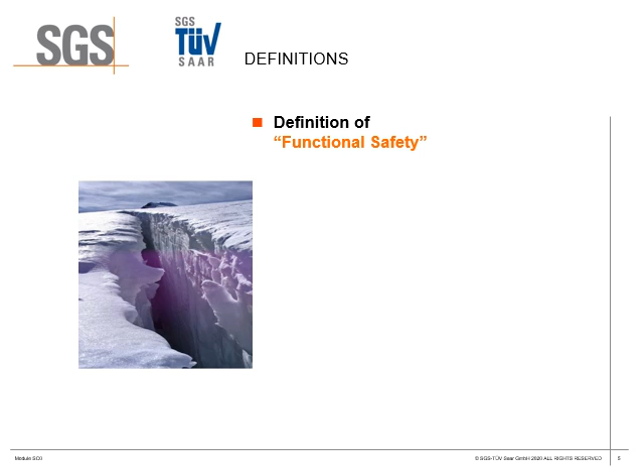But first of all, we have to do some definitions to understand functional safety. The definition of functional safety according to ISO 26262 is given as follows: absence of unreasonable risk due to hazards caused by malfunctioning behavior of EE systems. This is a complex sentence with some new expressions which I have to first explain.

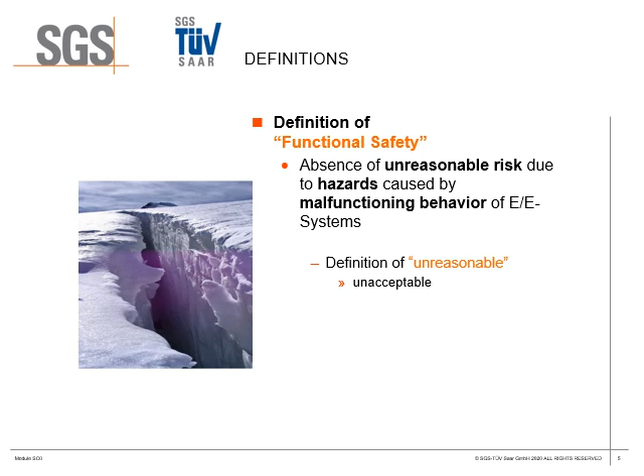What is the definition of unreasonable? What is the meaning of unreasonable? We can say unreasonable means unacceptable - unacceptable for most of us, that means unacceptable for society.

What is the definition of risk? This is very important to know, because risk is a combination of two things: the probability and the extent of damage. That means both probability and extent must be small or low to have a small risk. We can get a high risk even if only one of these components is high - if the probability is high that the damage will happen, then the risk is maybe high, or if the extent is high.

At the end of the day, we'll see that probability is the most important point for us, because if we can reduce the probability to a very low level, we can make the risk acceptable, or what is then defined by the standard as reasonable.

And finally, the definition of hazard. What is hazard? I define it in my own words as a state which may be dangerous for health and life. This is also important to understand - if we talk about functional safety, we talk about health and life, so nobody shall be injured or even dead.

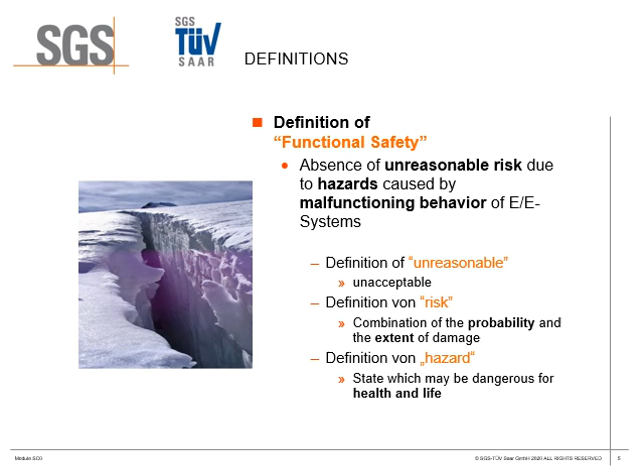This means, according to our definition, the malfunctioning behavior of the electronics may lead to a state which may be dangerous for health and life. Whenever we can reduce the risk to a reasonable level - that means absence of unreasonable risk due to these hazards caused by malfunctioning behavior - we achieve functional safety. In other words, we have to reduce the risk to the reasonable or accepted level coming from our electronics. Then we achieve an accepted level of functional safety.

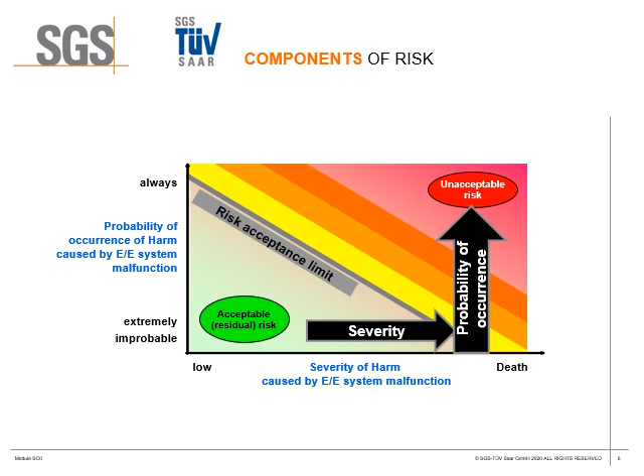This is the reason why standards, especially ISO 26262 for the automotive industry, introduce a level of risk called ASIL, the Automotive Safety Integrity Level. I think most of you have heard about it. It's not called a risk level, and we'll see why. First of all, to understand what it is, it's a 5-step scale: the lowest level is QM, then ASIL A, B, C, and D.

QM means that standard quality assurance is already sufficient to reduce the risk to the accepted level. In other words, the risk which we bring with electronics in the vehicle is acceptable by using standard quality measures. But this is very important: quality measures according to standards like IATF or ISO 9001 have to be established.

If we find out that we have an ASIL X, meaning ASIL A, B, C, or D, this means additional risk reduction measures are required. Additional means additional to the QM measures. The quality measures are already maybe a high level to reduce the risk, but additionally to this we have to add measures. The ASIL then describes the required integrity which has to be achieved by the determined safety goals.

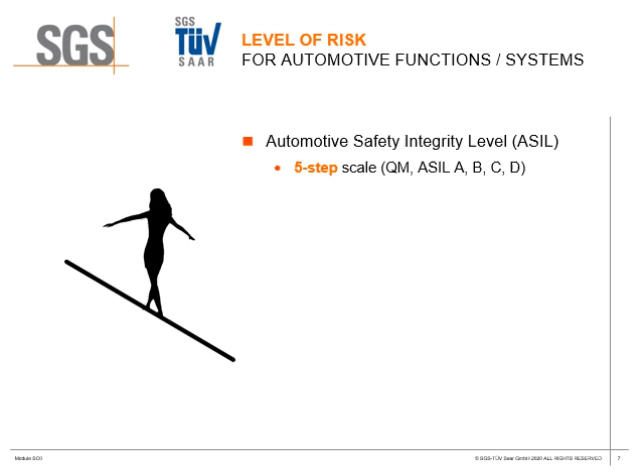Coming from the risk which we have to identify in the vehicle, we have to define so-called safety goals, and these safety goals then will get the ASIL. So first of all it is a risk level, but then it is a requirement to achieve a safety goal with a defined integrity. This is the spirit of functional safety: to define safety goals for the vehicle and to achieve these safety goals with a defined integrity, and the required integrity depends on the risk.

If we have an ASIL D, for example, as the highest level, we have to achieve our defined safety goals with the highest integrity due to the fact that we have a high risk behind it. So let's make an example. If we look at a functionality called driver airbag, the driver airbag shall deploy in case of an accident, to help the driver maybe to survive, to reduce the risk of injuries.

This driver airbag, which is driven by electronics, has the potential to deploy unintendedly, that means during normal driving, or it may have the problem that it will not deploy in case of an accident. Let's look at this unintended deployment. Unintended deployment during normal driving may lead to loss of control over the vehicle, and this may be dangerous, of course. So the result may be an accident.

So this is typically defined with ASIL D. It's a high level of risk that an accident will occur if we have an unintended deployment of an airbag. The safety goal which is then derived means an unintended deployment shall be avoided. And this safety goal must then be achieved with an integrity of ASIL D. That means QM is not sufficient; we have to do a lot of things additionally to reduce the risk to the accepted level.

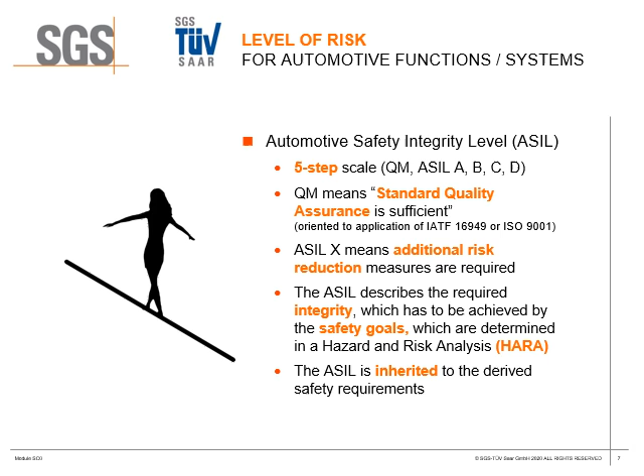Many people think it's a product property. No, it depends on the defined safety goals, and it depends on the risk behind it. And the ASIL never stands alone; the ASIL is always combined with the requirement. This should be clear in any case, otherwise you will never understand how ISO 26262 is working.

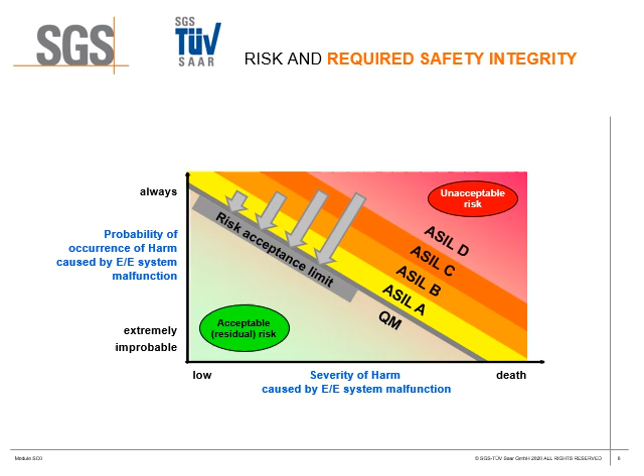So now, how shall we achieve functional safety in automotive functions and systems? The first point is to analyze the potential hazards and assess the risk. That means first of all we think about our potential malfunctions due to a malfunction of the electronics, like an unwanted or unintended deployment of the airbag.

So this is the hazard. And then we are assessing the risk. What is the risk behind? What is the probability of the accident at the end, and what is the extent of the damage to people? This is also called HARA, Hazard Analysis and Risk Assessment. This is always the activity we have to do when we bring new functionalities in vehicles driven by electronics or electrics.

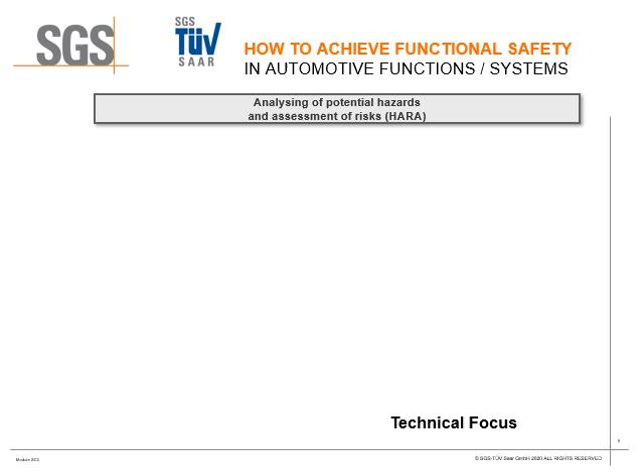So then the question is, if the ASIL is equal or higher than A, meaning ASIL A, B, C, or D, then we have to do additional measures to reduce the risk to the accepted level. If the result is QM, then standard quality management is sufficient, as already shown before. This does not mean that this malfunction will never lead to an injury to people. This only means that the risk can already be accepted by using quality management.

So let's go on. We say ASIL A, B, C, or D, additional measures to reduce the risk to the accepted level. What do we have to do now to achieve it? The first is the avoidance of systematic faults in general. Of course we have to know what systematic faults are.

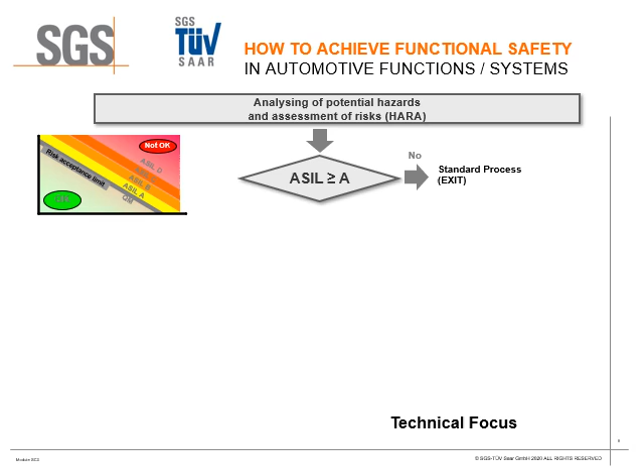Systematic faults, in general, are the faults which we bring into the product by our own doing - by a bad or wrong specification, by missing something in the processes, by missing something during the testing, and all these things. This means systematic faults, if we have a fault in the product, then all products have the problem that they have the same fault. And of course the highest target is to avoid these systematic faults.

How can we do it? We have to implement safety management, so-called development processes and supporting processes described in ISO 26262. This means ISO 26262 tells us what we have to do additionally to QM. And this is what we also call a process focus. So many people say ISO 26262 is a process standard, because there are so many processes described which we have to follow. And the target is really to avoid systematic faults.

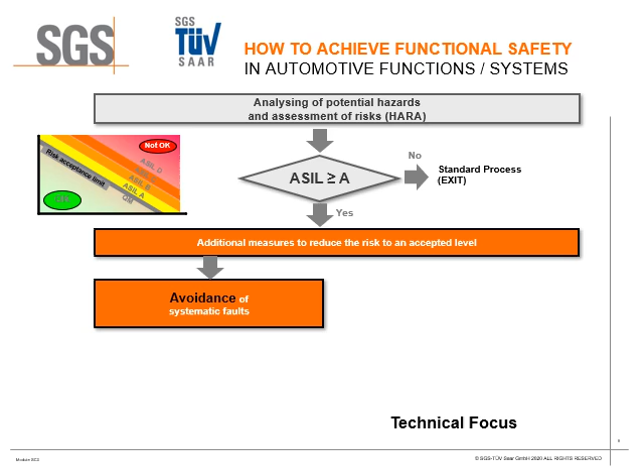On the other hand, of course, we may have faults which we are not able to avoid, or even in the hardware we will find so-called random faults. Per definition, hardware may fail randomly. These are called random faults. Random and systematic faults we may have during operation.

So then we have to control it. Control means we have to detect the faults and we have to react to the faults. That means if the fault, which has the potential to violate a safety goal, will occur, we have to control it in the time which we have available. Of course it can get very dangerous. If we think of a fault in the electronics which may lead to an unintended deployment of the airbag, as an example, it takes, I think, a few milliseconds for the airbag to deploy unintended. And this is the time we typically have to detect the fault, and react to it, meaning to switch off the airbag activation. This is what control means.

Control means we need requirements for function, system elements, hardware, and software. And this is also described in ISO 26262. This is nothing else than deriving detailed requirements top down from the safety goals down to hardware and software, and implementing it in a technical way. This is what we call the technical focus. At the end of the day, of course, we will then find in our systems and products many so-called safety mechanisms.

Now everybody should understand what functional safety is and what we're doing. Yes, we reduce the risk to the accepted level, nothing else.

So let's go on now with the second chapter, Introduction into ISO 26262. Here I want to explain a little bit more around ISO 26262, where it's coming from and how we use it.

First of all, the title: Road Vehicles and Functional Safety. It's a standard really for road vehicles. There are several other standards available for other vehicles like forestry, agricultural machines, and so on. ISO 26262 is mainly for passenger cars, and since edition 2, also for commercial vehicles and motorcycles.

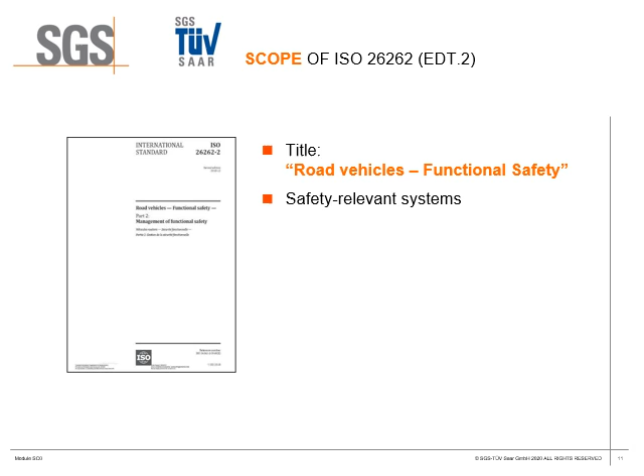So it is a standard for safety-relevant systems where we have one or several E/E subsystems. That is important, and I think this is what we already have seen in the definition of functional safety. Whenever we have electric electronics in a vehicle, automatically we have to talk about ISO 26262.

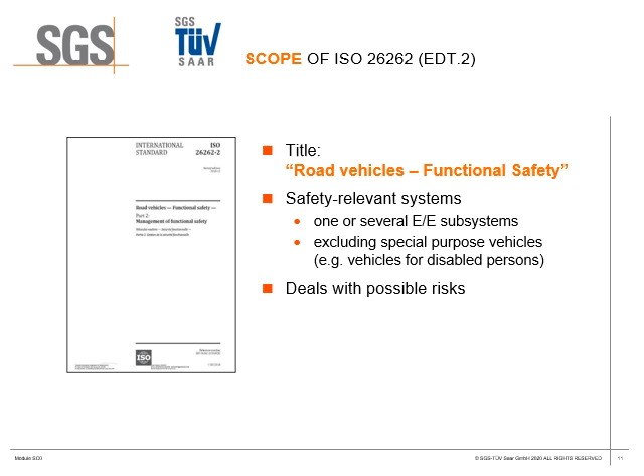Special vehicles are excluded, like vehicles for disabled persons, where different other standards or regulations are available. Again, it deals with possible risk arising from the malfunction of the E/E system itself, meaning caused by the respective E/E system itself. So it's not a question of whether we need an airbag or safety systems like ESP, ABS, or whatever else.

ISO 26262 tries to clarify what happens if you bring electronics into a vehicle. It makes no difference between a safety system, a non-safety system, or comfort system, but asks: what will happen if we have a malfunction? Is this a risk for persons, and can this risk be accepted or not?

Edition 2 now includes also motorcycles and commercial vehicles, which was not the case in edition 1, where motorcycles and commercial vehicles were excluded.

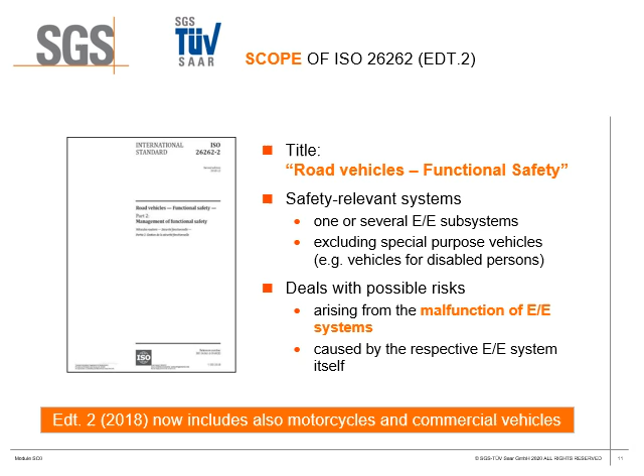On top we see part 1, the vocabulary, where all the definitions and abbreviations are explained. Then the management of functional safety is part 2. Part 3 is the so-called concept phase, where we will also find the HARA, the hazard analysis and risk assessment. Part 4 talks about system development, part 5 hardware, part 6 software development, and part 7 about production and operation.

So far so good, but we have some additional parts. Part 8 gives us supporting processes - I'll come back to this part later. Then part 9, the ASIL-oriented and safety-oriented analysis, all this FMEA, FTA stuff and so on. Part 10 is nothing else than a guideline with some more explanations and examples.

And part 11, now the interesting part for semiconductor development. Part 11 is a guideline for application of ISO 26262 to semiconductors. Be careful, it's only a guideline, it's informative. Part 11 tries to explain more about semiconductor development and how the other parts are typically to be used in semiconductor development.

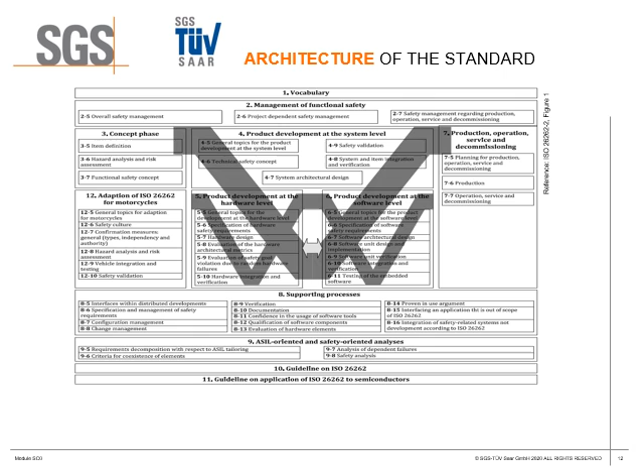So what we can say is that the new Part 11 gives a guideline for the semiconductor-specific interpretation of the standard. That means we're using the standard as it is, typically Parts 2, 3, 4, 5, 6, and 7.

Part 11 really gives us a guideline with very good examples, so it makes sense to look inside, because there are good examples given for how we can manage and fulfill the requirements.

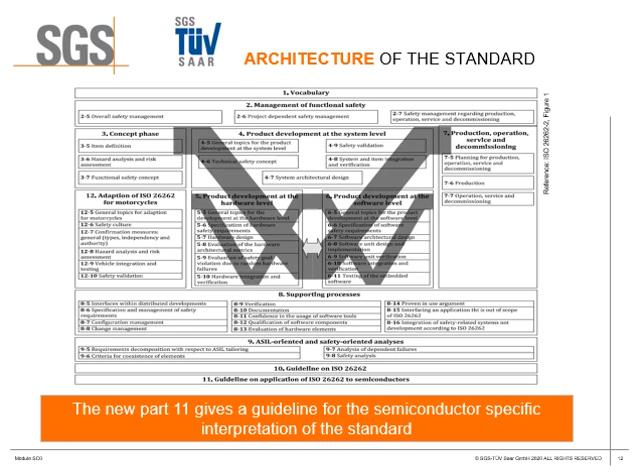So the question which very often comes up is, what are the legal aspects of ISO 26262? Is it mandatory? Is it really a law to use it?

What we can say immediately is no, it's not a law. It's not mandatory to use it for approval, for example type approval.

Like in Europe, we have the EC directives and ECE regulations for the automotive industry. This is not the same thing, and ISO 26262 is not mentioned there.

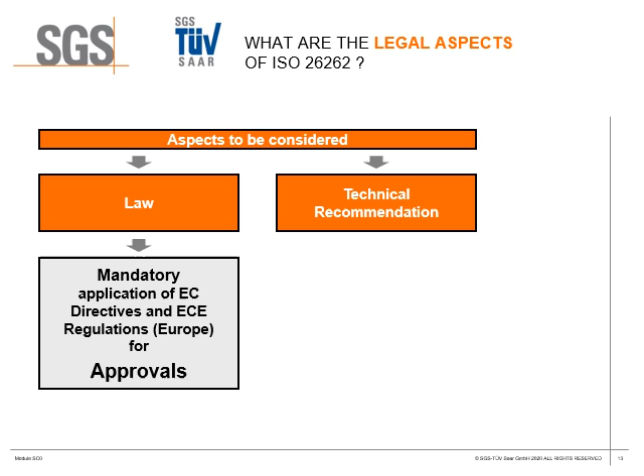What ISO 26262 is, is mentioned on the right side as a technical recommendation. That means it's recommended, like other standards—IEC, ISO, EN, DIN, and so on—recommended to achieve the current state of the art in functional safety development.

And here it becomes relevant. ISO 26262 is worldwide seen as a kind of standard. It is accepted by all members of the ISO, and can be seen as a kind of state of the art.

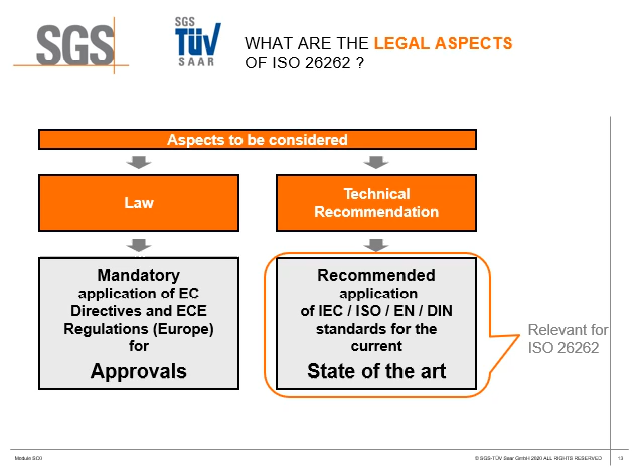So the legal consequences, if we know this, are that the published ISO 26262, meaning the normative Parts 1 to 9, describe a kind of state of the art. So it's typically used to say, yes, this is state of the art in automotive functional safety development, which shall be achieved.

Even if it's not mandatory given by law, we have no other standards available, and it's accepted worldwide. Product liability laws don't really reference this standard, but they require state-of-the-art developed products when placing them on the market. So it's important to know.

That means whenever we bring a product to market, we have to ensure that it is developed according to the state of the art.

Now the question is, what is the state of the art for functional safety in automotive? We can assume—that's our estimation—that if we follow ISO 26262, we do most things expected to fulfill the state of the art.

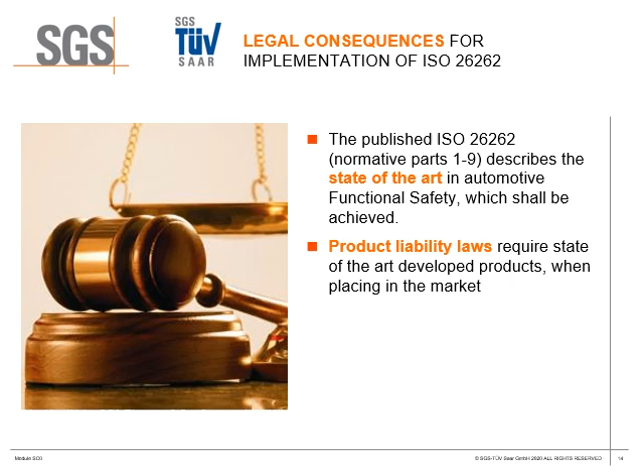So what we can say is ISO 26262 is an important argument for achieving the state of the art in functional safety. And this, I think, is the reason why OEMs and car manufacturers require these standards from their suppliers. They say, okay, please develop it this way.

I know from some big OEMs that they don't ask for ISO 26262 from their suppliers directly—they ask for state-of-the-art development, because in the background are the product liability laws. And what you can do, of course, is follow ISO 26262.

So how does the standard now work? Typically, at the end of the day, we need a vehicle—here a car is shown—which has implemented many functionalities that are functionally safe. Remember what we said: the risk is reduced to an accepted level in all these functionalities, due to their potential to get malfunctions in the electronics.

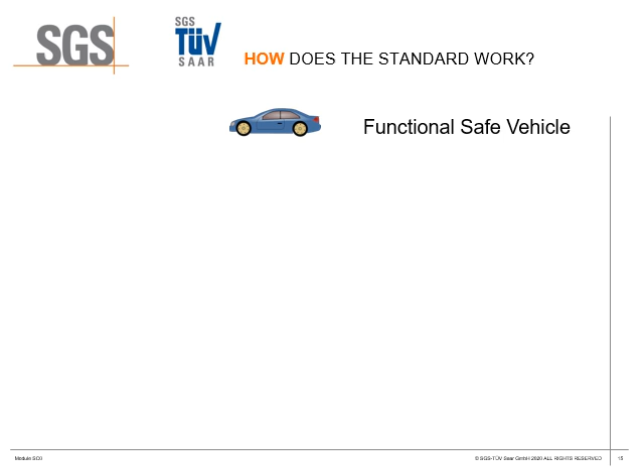So these functions, or these safety-related functions in the vehicle, are typically called items. This is already an expression from ISO 26262. So we have item 1, item 2, and so on. Item 1 is a driver airbag, item 2 is a low beam light, item 3 is a brake system, and so on.

Yes, many items which we have, and these items must be safe, or functionally safe, at the end, with their E/E components inside.

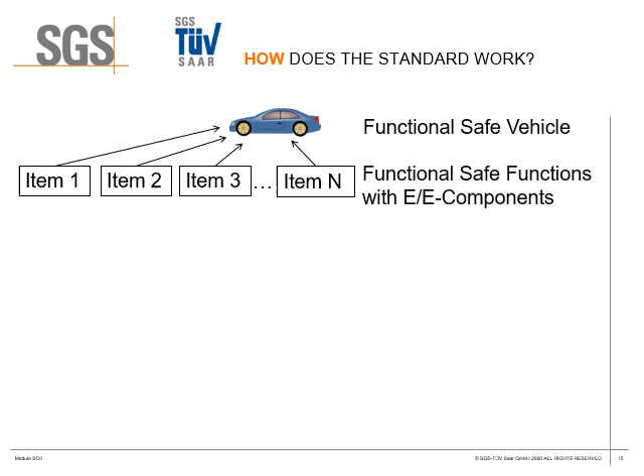So what we've already seen is that we have to derive, in a HARA—a hazard analysis and risk assessment—safety goals. That means for all these safety-related items, we derive, or determine, safety goals. There could be one safety goal, two, or several safety goals per item.

Remember what we said for the driver airbag: we said, okay, it's a driver airbag, and safety goal 1 was that unintended deployment shall be avoided—ASIL D. Another safety goal for this item, the driver airbag, could be that the driver airbag shall deploy in the case of an accident.

Maybe only ASIL A. So you see, the safety goal depends directly on the functionality, and of course the ASIL which we get is typically derived from the HARA, the hazard analysis and risk assessment.

So the next step typically is to derive from the safety goals detailed so-called functional safety requirements, to achieve the safety goals. We describe on a functional level how we try to achieve safety goals, like faults shall be detected, faults shall be detected within a specific time, so the reaction on faults shall be done in a specific time. Switch on power, off power in case of this and this. If speed is higher, so and so, then do this and this. So these are typically functional safety requirements, which are typically directly derived from the safety goals. And what I already mentioned before is that we typically inherit the ASIL, meaning one safety goal typically has several functional safety requirements derived with its specific ASIL, of course.

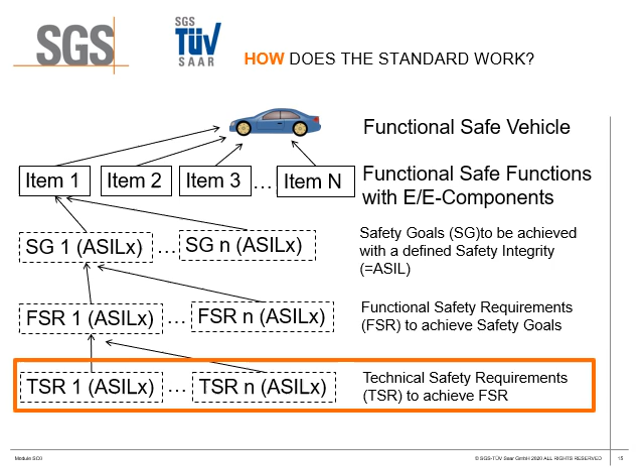So this was a short introduction now for functional safety. Remember what we're doing: we do a risk reduction. This is why functional safety is also very often called the risk-based approach. And ISO 26262 has the idea, okay, we have safety goals, we derive top-down requirements, and we have to implement it within our products.

Now let's talk a little bit in more detail about the semiconductor development. I want to show you some of the most important blocks which shall be implemented to be in compliance with ISO 26262. Of course, I think the standard has more than 300 single requirements, and I cannot explain it here. I can give you only a short overview to understand what are the main blocks. So I call it also building blocks for functional safety.

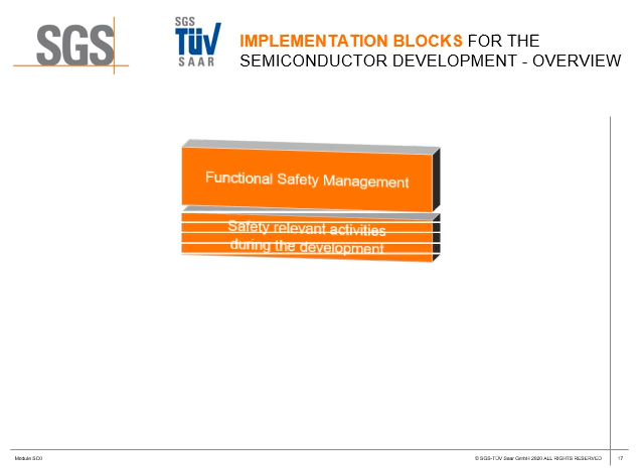So let's start with the so-called functional safety management. Remember, functional safety management was one point to avoid systematic faults. The second one will be then the safety relevant activities during the development. So along the V-cycle model development, remember we typically follow requirement management, verification steps, and so on. Yes, we have to do some additional things to our standard development process.

Then the safety relevant activities during production could be relevant. The safety analysis is a very important point to understand, because safety analysis helps us to verify our design and find faults.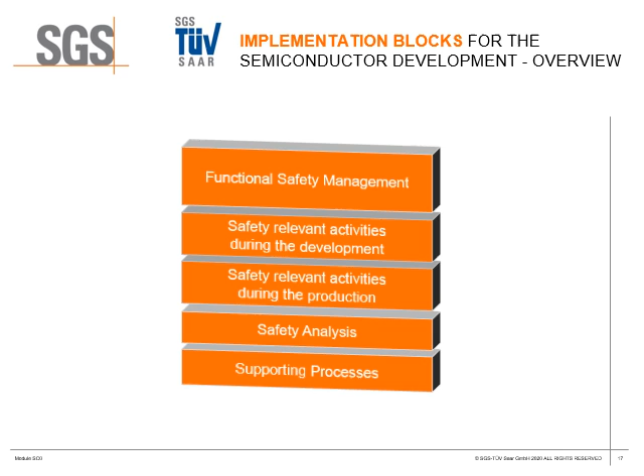Specifically systematic faults in very early phases of the development. And finally, the so-called supporting processes - additional things we have to do as an add-on to our quality management process.

To increase the quality more than it is at the moment with your standard processes. Let's start with the functional safety management and look a little bit deeper inside. What is it?

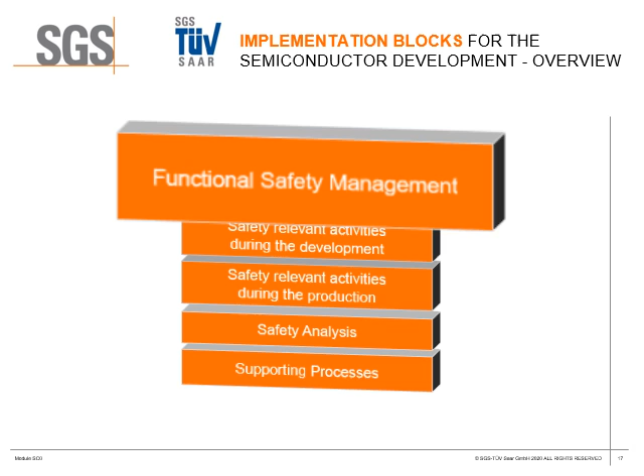Typically, functional safety management is based on quality management. And this was the reason why the lowest level, remember, in HARA is QM. The basis is always QM. QM must be fulfilled. Or with other words, no functional safety without a quality management system.

And on top, for ASIL A, B, C, and D, ISO 26262 requires this management of functional safety, which coordinates the requirements to be met by functional safety. So here below, we see it in the overall architecture. It is shown in part 2, ISO 26262-2, in 3 chapters.

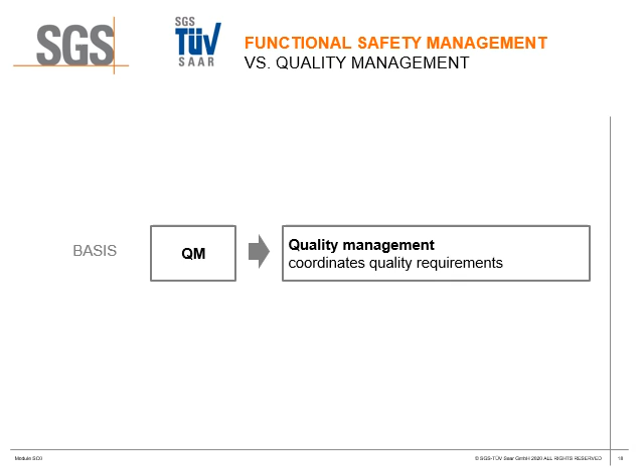So 2-5 shows us the overall safety management, which is typically the management which has to be implemented in your company with all the processes, tools, templates, process descriptions, and so on.

In chapter 2-6, the safety management during the concept phase and the product development - that means the safety management which has to be done during the development itself. And the third part is the safety management after the item's release for production, meaning after SOP, after tape out, which we have to follow typically.

So in all these 3 chapters, we will find requirements to be fulfilled. And we will also find some, not all, let's say some which are different depending on the ASIL A, B, C, and D.

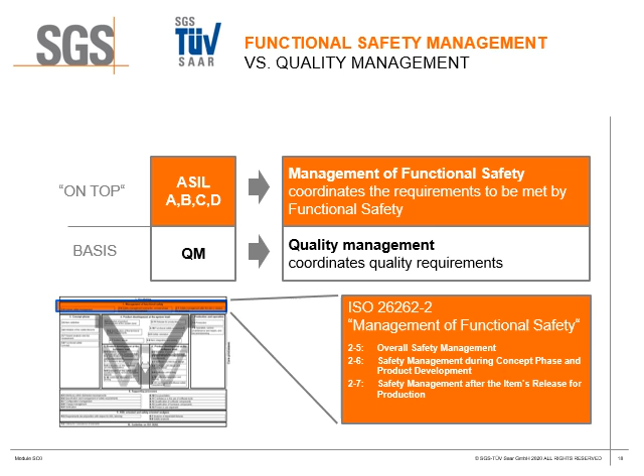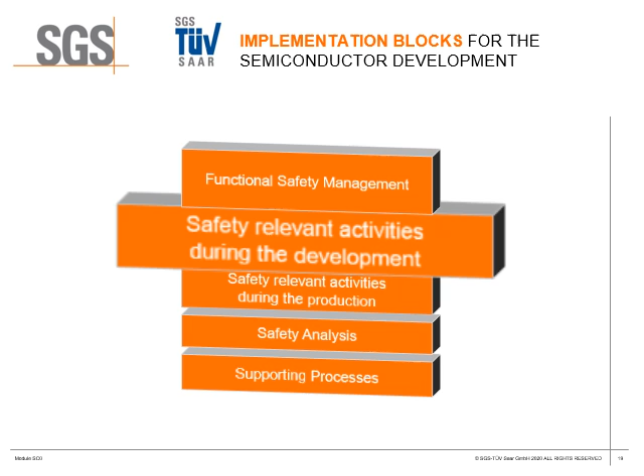Let's go on with the next building block, the safety relevant activities during the development itself. So now the question is how to develop functionally safe semiconductors. What we've seen is you follow typically your standard processes, which are on a very high level, on a high quality level.

And the semiconductors typically are standing at the starting point of the supply chain. You supply your semiconductors to customers, your ICs or your IPs even to your customers, which require or expect that you fulfill the requirements according to ISO 26262.

So typically, semiconductors are not especially considered in the system development process of ISO 26262, but we will see that we have to start here. And it's also not covered especially in part 5. So this was the reason why ISO 26262 now added additional considerations in part 11.

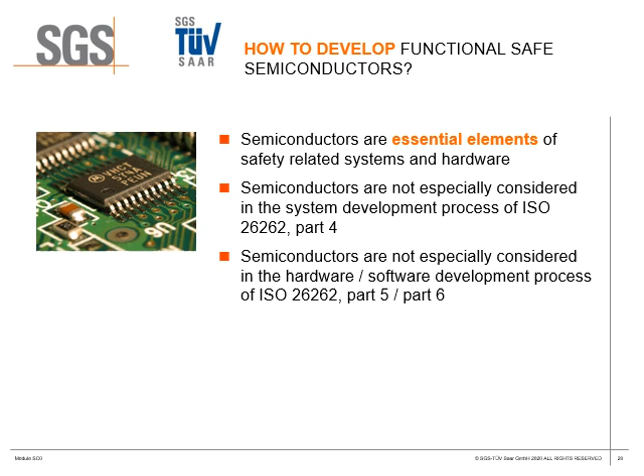How semiconductors are to be handled, and it gives, for example, failure modes, things which we have to do - analysis, examples, and so on for the semiconductor development - as an example to understand part 4, part 5, and if software is included, even part 6.

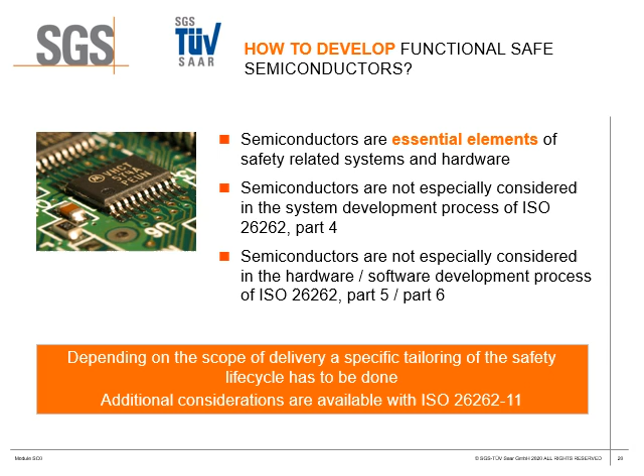So, in my opinion, the typical development steps or additional steps for functional safety for semiconductors are always the same. Step 1 describes the initiation of semiconductor development and definition of scope - what will we develop? Is it an IC? Is it an IP? Which application is it used in? Use cases and all things around.

And then we are already in step 2. Step 2 describes assumptions on safety requirements at concept and system level. Concept level here means really on vehicle level and on system level. So assumptions, or of course, maybe you will get real requirements from customers.

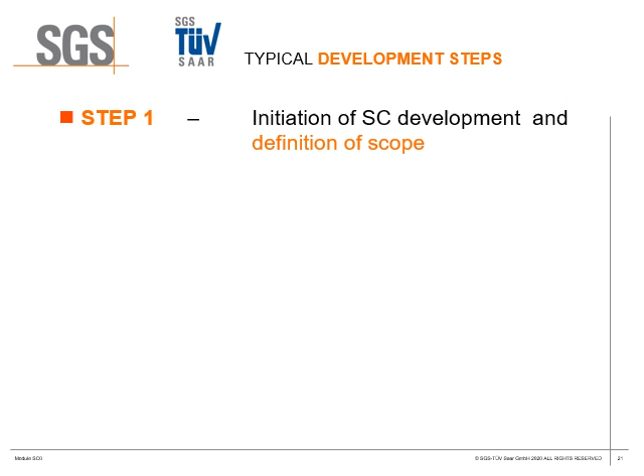But very often we call it here safety element out of context development. That means we have to define assumptions ourselves - for example, say this semiconductor shall be used in an airbag application, where the safety goal is this and this, where the ASIL is this and this, where the requirements are this and this. These are assumptions which we first have to do to be able to derive requirements.

And this is step 3. In step 3, we derive safety requirements on system level first - on this highest level, what is required. Here also we typically require already probabilistic target values, the so-called hardware metrics. Maybe you've heard about it.

And we do the design, the system design - chip design, for example. Step 4 is then nothing else than one abstraction level below.

So we derive more and more requirements top down to hardware and software level, and make the design for it, of course, to fulfill these requirements. Step 5 is typically then the integration and the testing, the right leg of the V cycle. Maybe you will say, yes, this is what we typically do. We derive requirements, we make a design, and we make the integration and testing. And you are right, this is not different to your standard development typically.

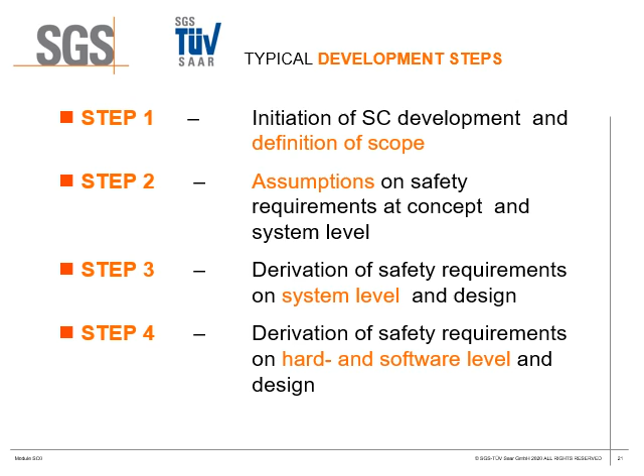But we have additional requirements, maybe derived from the safety goals top down. These additional requirements have the ASIL, and depending on the ASIL, ISO 26262 requires to do several things. For example, to show that the hardware metrics typically are fulfilled, or to follow in the software specific processes using techniques and measures depending on the ASIL, and so on. Or for the testing, to use specific test mechanisms, test methods, depending on ASIL. This is then the difference and what I call the add-on for ISO 26262 development. That means, in the best case, you have not to change your already established development process, but you will get several add-ons what are required from ISO 26262.

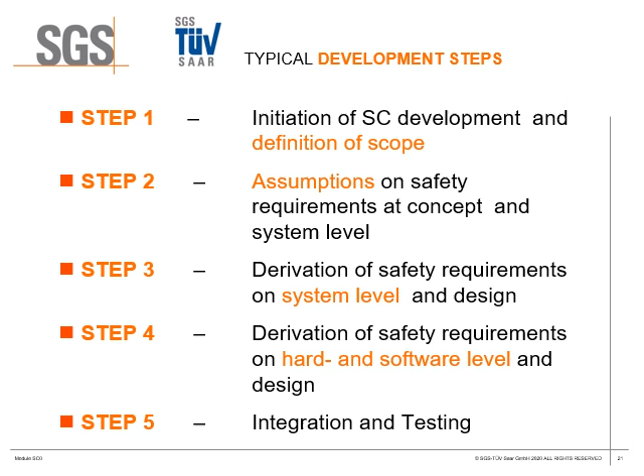On hardware and software level, then we go one step down in the abstraction. So we go on sub-block level, standard IPs and so on. And the second level is then really to go inside the hardware and the software, the implementation on gate, transistor level, and of course on software level. So then we talk about part 5 and part 6, where we, especially in part 5, have to show that the so-called metrics are fulfilled. And if we cannot fulfill these metrics, we have to add maybe some technical features to be able to detect more faults and to control more faults. And the same procedure in software level, but on software, there are no metrics to be calculated. On software, you have to follow a detailed software development process with all ASIL dependent methods and techniques to be used.

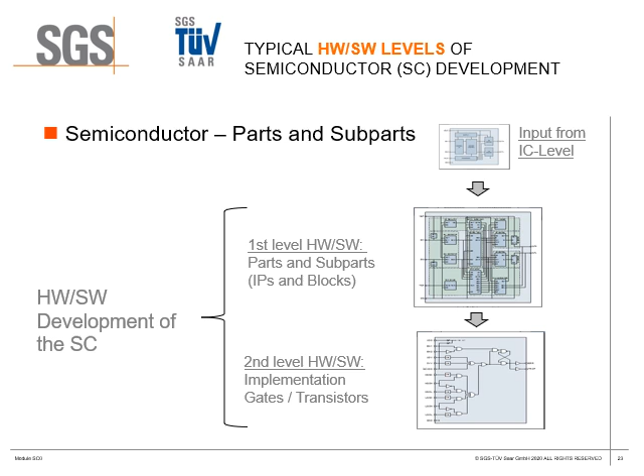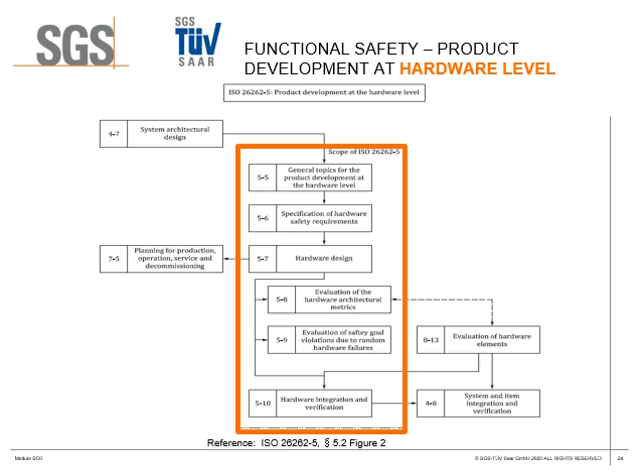So for the hardware, here is a process model. This process model is still from edition 1, but I think it's not very much changed. Only this 5.5 has been shifted to the other part. So what we can see, we come typically from the system design, from our chip design. We derive it down to a specification of hardware safety requirements. We do the hardware design, and the most important points are these probabilistic calculations, which are typically done with FMEDA, called failure mode effect and diagnostic analysis, FTA fault tree analysis, and also here the dependent failure analysis, which is typically required. That means on hardware level, the most effort which we have is really to show that the target values of our metrics according to the ASIL are really fulfilled.

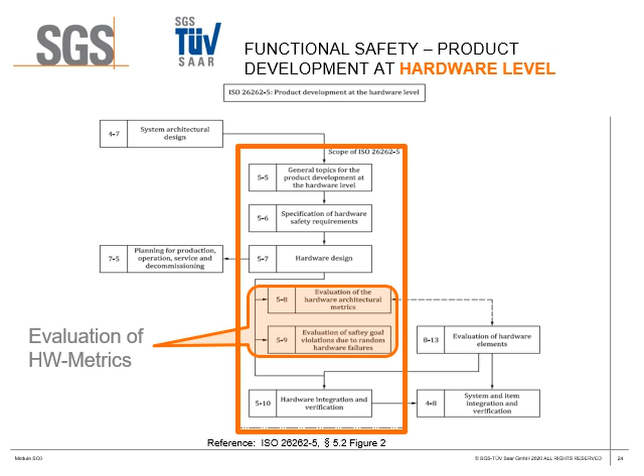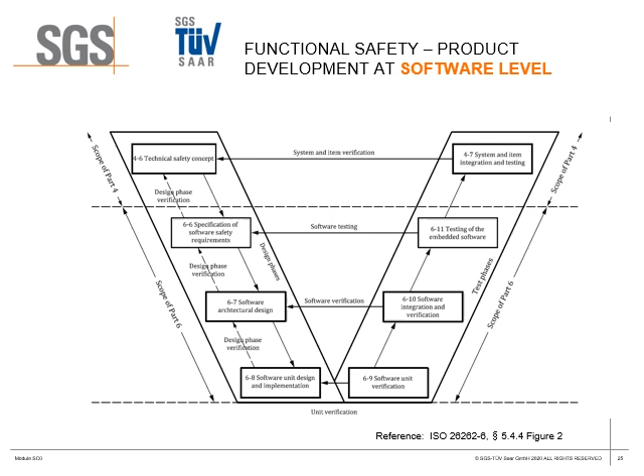So let's go on with the next step, the safety relevant activities during the production. What we can say for semiconductors, the basis typically are the AEC-Q standards, 100, 200 typically. And of course, to follow our quality standards like ISO, or now called IATF 16949 requirements, which are also mentioned by ISO 26262. What we typically have additionally is the planning of so-called dedicated measures. Dedicated measures we always need if it is required from the development, to do a burn-in test, for example, to have oversizing, over voltage sizing here called, or define how to handle necessary modifications and so on.

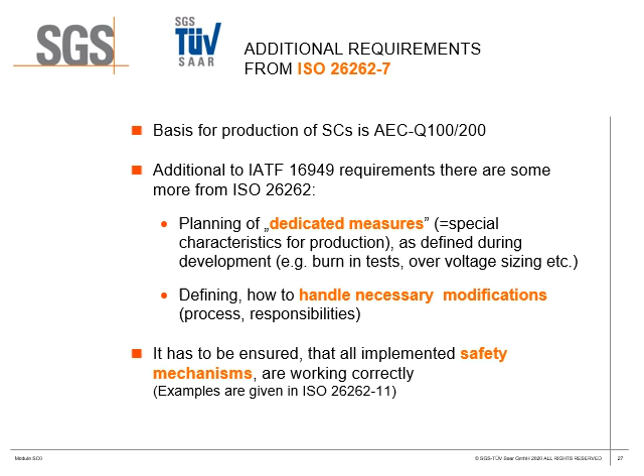So what we can say in the production, there are no ASIL specific requirements given. So we need a way to handle requirements from the development, coming from the development, even during production, if necessary. So it has to be ensured that all implemented safety mechanisms are working correctly, and there are examples given in ISO 26262 part 11.

So the safety analysis can be seen as a necessary analytical verification method. Maybe you know FMEA and such things, which help us, typically before we do the testing, to find faults in very early stages of the development.

ISO 26262 mentions in part 9 three different kinds of analysis. The first is the analysis of the interdependency of elements, also called freedom from interference. It has to be performed if there is a need for coexistence of different ASIL requirements. The other way is to handle everything according to the highest ASIL, and then it's not required.

But if you decide that you have different requirements with different ASIL, then we have to do a so-called freedom from interference analysis. The second point is to do an analysis of dependent failures, where it's necessary to identify the so-called common causes and cascading faults. This can be seen as mandatory.

It's mandatory especially on the semiconductor level, to be performed especially to argue for the so-called ASIL decomposition. This is a special technique which allows us to reduce the ASIL due to redundancies. But I would say a DFA is in any case necessary, because also the functionality and its safety mechanisms should be independent, also in these cases.

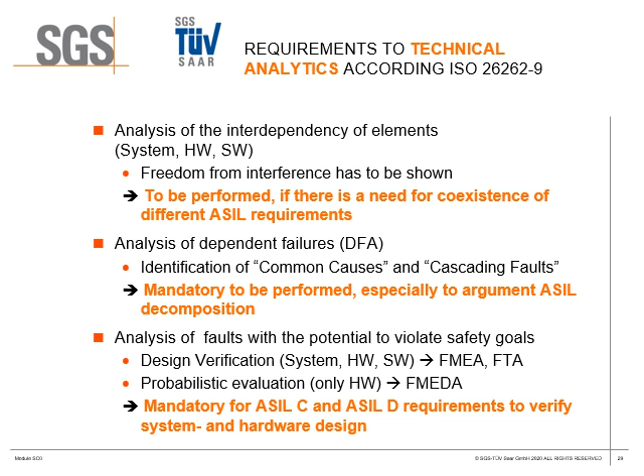And then, as I've already mentioned before, for the hardware we have to do the probabilistic evaluation. Really do probabilistic calculation, which is done with a method called FMEDA, failure mode effect and diagnostic analysis, to be able to calculate at the end the hardware metric values, which are mandatory for ASIL C and ASIL D to verify system and hardware design.

So this is a typical table from the standard. The standard does not really require FMEA or FTA - these are only examples. You see the plus for ASIL A, B, C, and D. An inductive analysis has to be done on hardware, on system and on hardware level.

This could be seen as mandatory - this is what most companies are already doing, FMEA at system level and hardware level. A deductive analysis like an FTA, which follows a top-down approach, typically we see the plus can be seen as mandatory, or the standard calls it highly recommended, for ASIL C and D additionally.

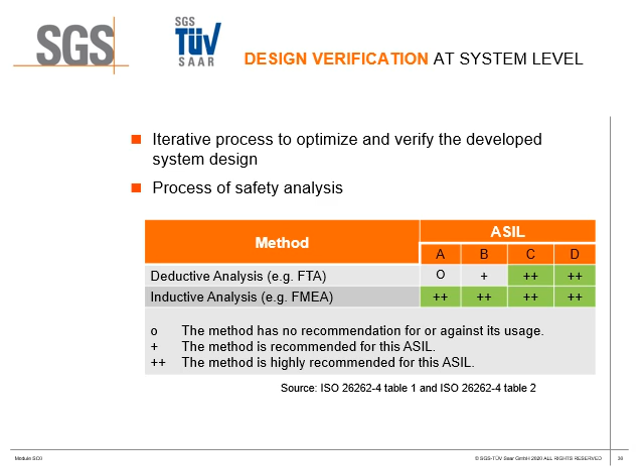So here typically shown is how this hardware metric evaluation is typically done in the semiconductor area. The known method I already mentioned before is FMEDA. What we do is show the robustness of the hardware architecture according to the ASIL required, and at the end the total safety goal violating failure rate can be shown.

So how is it done? It's an FMEDA, so this analysis is done at IP level. The result from this IP FMEDA is typically the input to the FMEDA at IC level. This is why IC suppliers very often now require from their IP suppliers the results from the FMEDA, to be able to fill in the numbers in their own FMEDA.

And the result of the IC level is then typically given to the system provider, or to the item level, where it's then possible to do this calculation on system level or on item level, and to show that the metric values are really fulfilled. This means the system or the function, or as the standard calls it the item, is sufficiently robust enough.

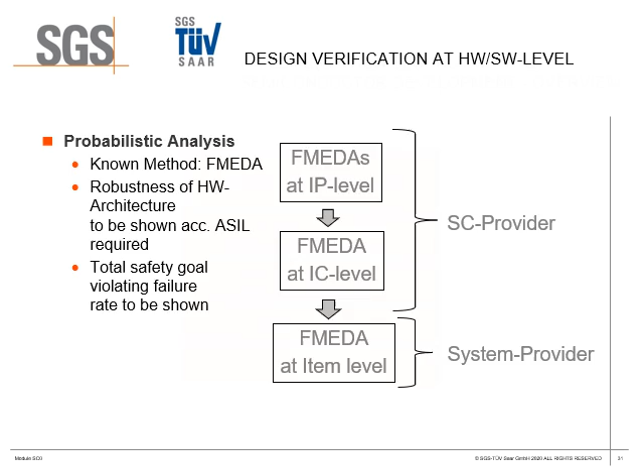In addition, there are two new ones, but these are only relevant for commercial vehicles, or let's say trucks and buses typically. What we see here are typically things which have to be followed and implemented, like interfaces with your suppliers, project management, configuration management, and so on.

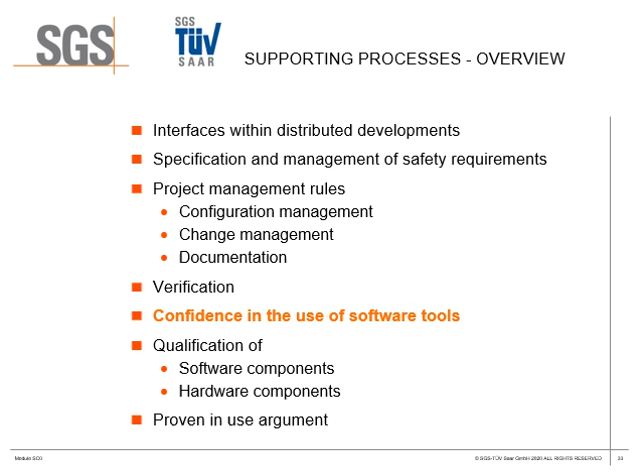I want to pick out only one of these, because I think this is an important point. This is very new to follow: confidence in the use of software tools.

So this is the so-called TCL assignment. This means for all tools which we're using in the development - development tools, verification tools, requirement tools, all software tools - first we have to do a kind of classification in a tool confidence level. How confident is this tool?

The standard gives us a method. It works in that way that we first have to identify the so-called tool impact. Has this tool really an impact on functional safety? The second point is, do we have the chance to detect errors in the tool itself?

Maybe within our development process, in a later step, where we say, okay, if the tool would make a fault, we will detect it during testing or something else. This is then covered by the tool error detection.

And so the standard knows 3 TCLs, tool confidence levels. TCL 1 is the best one, shown here in green, where the standard says if we achieve TCL 1, there's no qualification of the tool really necessary to be done.

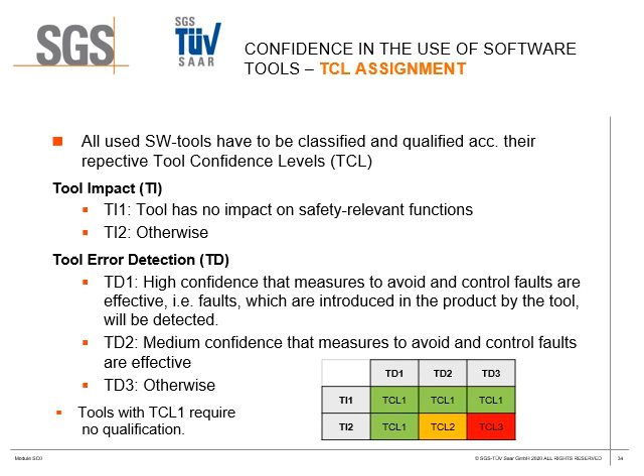Here in this table, ISO 26262 says for TCL 2 and TCL 3 tools, we have to do an additional qualification. And here 4 methods are mentioned.

So the first two can be used for a TCL 2 tool up to ASIL C, typically shown here with the plus in green. And for a TCL 3 tool, only up to ASIL B.

The third and fourth one can be used in any case, but maybe it's more difficult to realize. Like 1C is a validation of the software tool - to validate it means we need detailed testing. But this is only to give you an example.

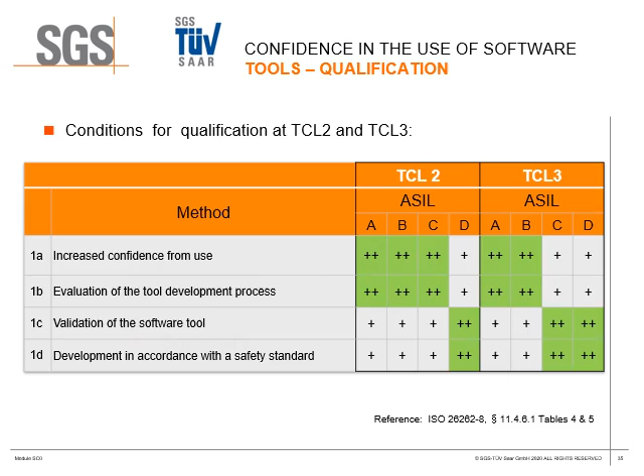Of course, our experts will explain this much more in detail, and we have some very good examples and exercises where you can train it in our detailed trainings. So I think this was it in general. Let me do a short summary.

So I tried - of course it's not complete - to summarize typical output documents for semiconductor development, what we typically need to fulfill ISO 26262.

We have to do a so-called functional safety management. That means everyone who has to work according to ISO 26262 has to fulfill the requirements according to part 2 of the standard, functional safety management.

So typical work products or output documents are the so-called safety plan, where we plan all activities, and a functional safety assessment plan, where we plan how to assess and who will do at the end an assessment whether functional safety is achieved or not.

A functional safety verification plan, detailed planning how the verification has to be done by the use of analysis, testing, calculations, reviews, and so on.

And tool qualification is also a very important point, which is always necessary to list all your tools which you are using in your project, and if necessary, also to have the reports for their qualification.

At system level, for the development phase, we typically need assumptions at system element level. This is what I already mentioned before - we have to do some assumptions. What is the safety goal? What is the application? What is the ASIL?

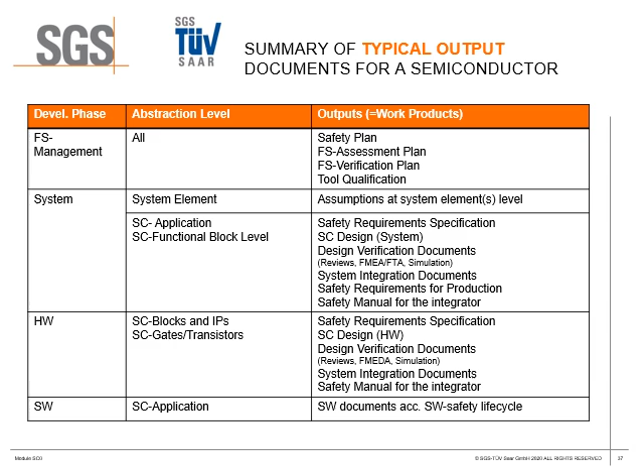So this is, of course, only short to get an overview. There we need additional documents typically, and this is typically done at the beginning where we do the planning - what are really the add-ons which we need to fulfill ISO 26262. So I think this was sufficient for the moment - yes, I think it was very much. But you should now have an impression of what ISO 26262 wants to have, starting with what is functional safety and then how ISO 26262 is implemented. And of course, you need much more details.